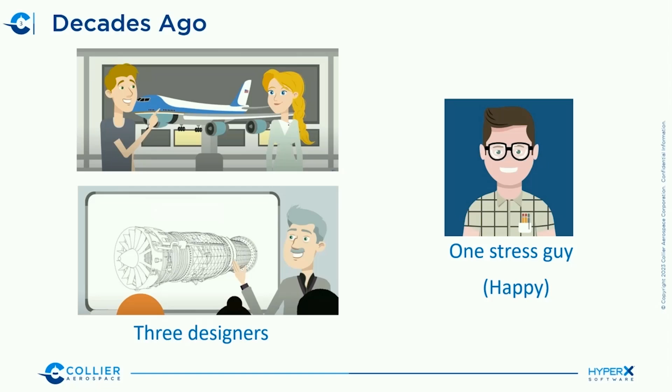Chris mentioned that back in the 1980s, there were essentially 3 designers per 1 stress engineer. In general, the stress guy was happy back then because he was able to stay 1 step ahead of his designers. He was able to answer their questions and use his experience and judgment. He could inspect a part, define the load path, figure out what the critical load case and critical failure mode would be, and analyze to that. He wouldn't necessarily have to analyze to all the different failure modes that could exist. That's the reason he had the time to do it.

Myself, I was a stress engineer. I worked on the B-2 stealth bomber in the 1980s, and everything was done with a sheet of paper, a pencil, a calculator—not a slide rule, because I'm not that old. Literally, it was only maybe that thick, and a whole part was nothing but that thick of paper with hand calcs. We used 4 significant figures for the variables.

Then in the 1990s came Excel, the spreadsheet. So not just in the financial markets, but also in the stress community in the aerospace engineering world, we started doing margin of safety calcs with spreadsheets. They became sort of like baseball trading cards, where people were like, oh, this is kind of cool, I'm going to create my own Excel spreadsheet and do a margin of safety calc. Over time, it became the norm, the expectation, that every single margin of safety had to be calculated for every almost load case. You couldn't really leave any stone unturned.

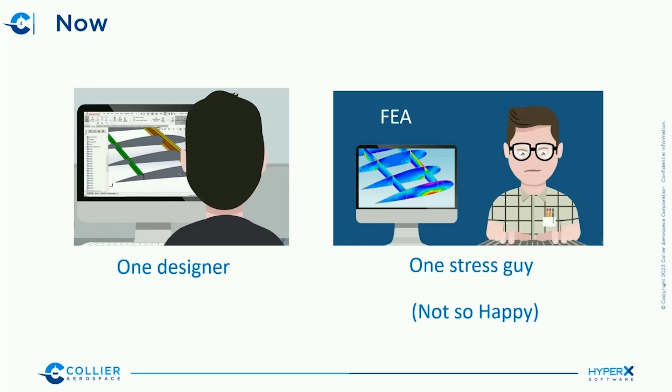Designers, while they have their parametric CAD systems and are able to do quicker changes to their model—in the case of the wing, you can see here the ribs and the spars—maybe you can change the flange width of a rib. But the stress guy is over there busily typing away on his computer, having to analyze every part to every load case with finely meshed finite element models, looking at the strains and stresses in those elements, and then having to go to Excel and figure out how to get that data in to do those calculations.

It's burdensome, right? So yes, FEA and Excel are useful tools, no doubt. Now we're more thorough in our analysis, but we're not keeping up with the designers. So the villain clearly then would be the volume of the data—it's the copying of data from one output and pasting it to the software of another program.

And of course, in Excel, you have all the issues with the cell math. You have different sheets, different references, very long formulas, and these little small calculated fields. It's very cumbersome to figure that out and maintain that data.

What we do know is model-based engineering is here to stay. The idea of not leaving any stone unturned is going to remain with us, and that's a good thing. But what we're promoting is the use of HyperX along with those FEA models, letting the models do more of the load path determination, and letting HyperX take over from there.

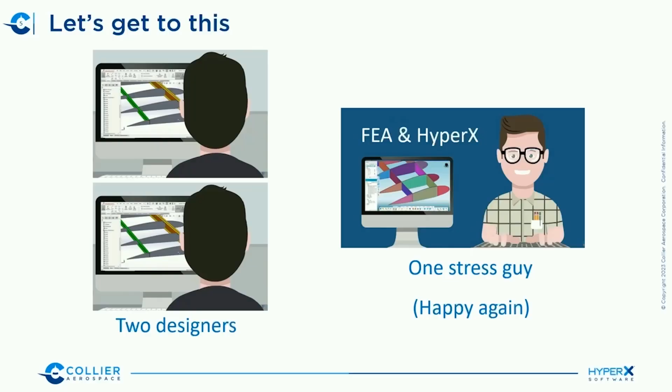So performant automation is the essential part of what we do with our software. And as a way to explain it, let me go back in history.

So after I worked on the B-2, I came to NASA Langley. I met Phil Yarrington - he's back there. He's been with me from the very start. We both worked in the hypersonics office here at NASA Langley on the hypersonics program, and our group's purpose was to evaluate contractor designs that came in from Rockwell, McDonnell Douglas, or General Dynamics. These names are all changed by now.

Because it was an unusual flight trajectory, the aircraft itself was unusual - things we had never seen before. And also the material systems were very unique. We had carbon-carbon, silicon carbide, metal matrix composites, of course your typical polymer composites, superalloy metals, and then a whole bunch of panel concepts. These panel concepts were kind of unusual too.

And we had to look at all these combinations rapidly. We had to figure out if the airframe would fail, and we had to figure out what the weight would be if it survived.

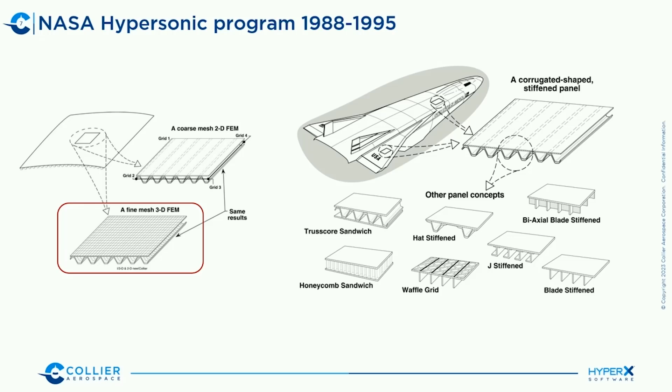So one of the things I did from a mathematical perspective was, if you look in the bottom left here, you can see traditionally the way that models were made was to discretely mesh the stringer, either with shell elements or bar elements. But the problem with that is a high element count, slowing everything down. So I came up with a thermoelastic formulation that would accurately represent the behavior so that the global finite element model could have less elements. They could be planar - they didn't have to represent the discrete shape of the stringer.

And what that also provided us was the ability to rapidly explore or evaluate different concepts, different shapes, without having to remesh the model. So that was an example, from a mathematical perspective, of how we were able to not produce more work for the stress engineer, but actually help the stress engineer get work done faster. And that's really what we're about.

So if you look at our software over time, in the early 2000s we already had this series of chained workflow automation. I'll just let you guys read those for a moment.

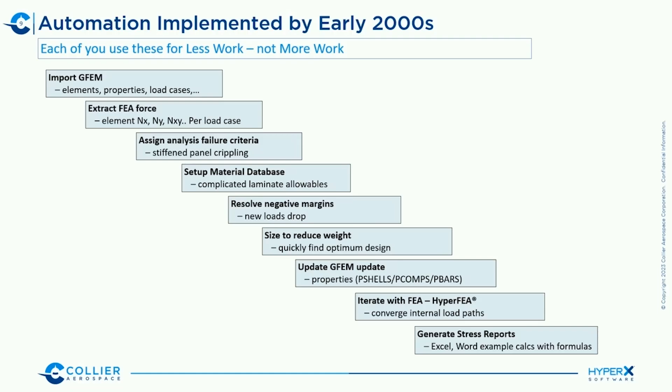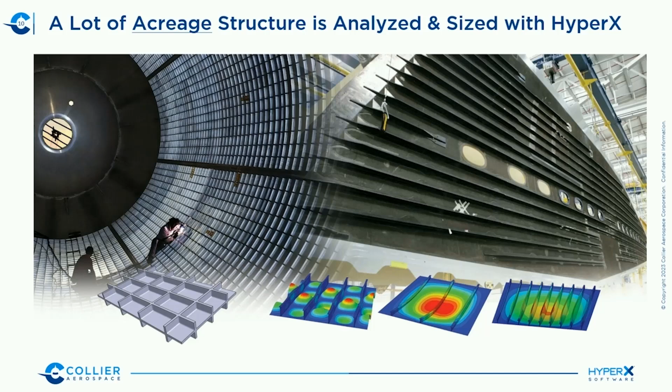I know that all you guys that are true HyperX or hypersizer guys would agree that these are the functions our software performs that really do help you get your job done faster. You may say, Craig, okay, we get it, you help automate. But I'm not convinced yet that you're really going to help the stress community get back to maybe even a 2-to-1 ratio.

To do that, I would have to convince you that we also impact a lot of structure. So if you have an aircraft, it's not just a flap, it would be the acreage area, right?

So if you look at the image to the left, this is a Space Launch System hydrogen tank, quite a large piece of structure. Everything you see there, the metal orthogrid, HyperX analyzes, optimizes, and does the stress reports for. On the right, you're looking at the upper skin cover of a commercial aircraft. Composite, same story - we perform a lot of the analysis and optimization for that.

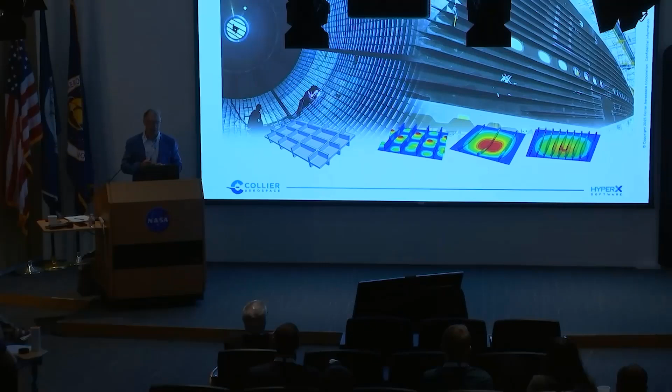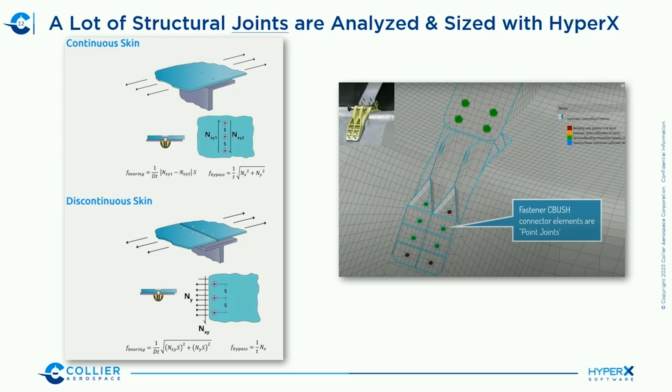A lot of the failure modes you see at the bottom there that you traditionally would need FEA for, we're able to do either analytically or with some kind of energy buckling solutions. We also do a lot of joints, not just mechanically fastened joints, but also bonded joints as well. So maybe you're getting a sense that, yeah, we do impact a lot of structure.

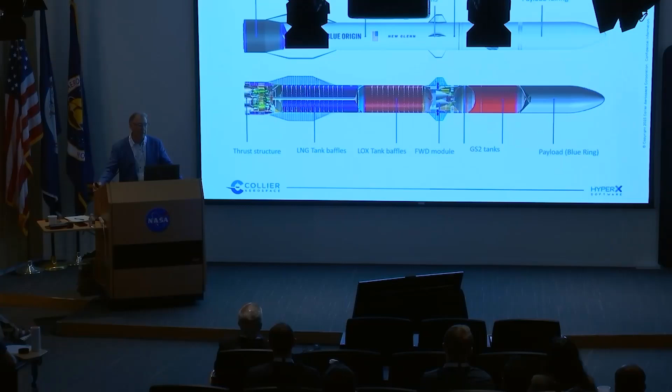The top image is the OML, and you can see all the structures there that we've impacted. The second image below that would be the internal part of the rocket, and that's all the other pieces that we impact, like baffles and thrust structures.

So let me change gears for a moment. Let's talk about the presentations for today. First up, after I speak, is going to be Paul Dufour from Boeing Phantom Works, and he's going to be sharing with us the use of our software on Boeing Phantom Works projects.

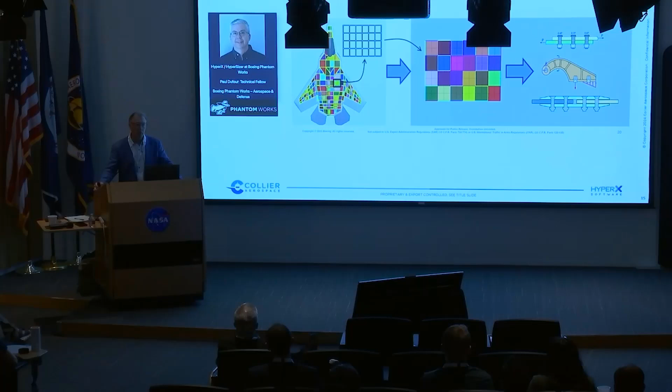In addition to that, you see that green square in the middle, and that could actually be different panel concepts. Let's assume it's a metal orthogrid. So the metal orthogrid has these local stiffeners, and as I mentioned before with NASTRAN, that smeared approach allowed us to very effectively represent that with a coarse model. We're doing maybe the same here at this phase of the project, but we are still able to size this orthogrid along with the bones of the structure.

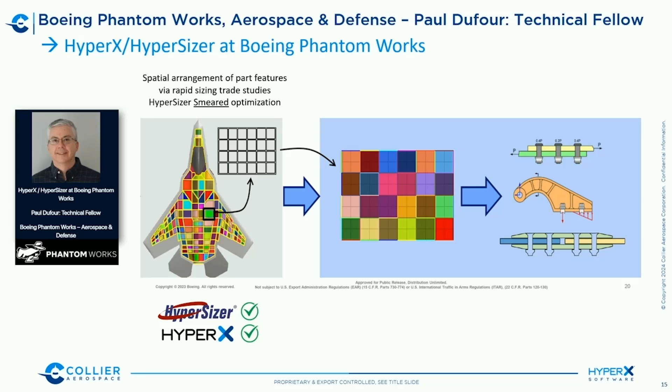And hypersizer was used for that, and I got a green check mark box next to HyperX because it's taken us working with our industry partner, but it has now been approved for use on their projects. Paul's going to be talking to this topic.

So after we go through that phase of a project, you make a decision on the layout and even the details of the panels, and you do a local sizing, pocket by pocket and stiffener by stiffener analysis. In this case, this is discrete optimization because the model is discretely represented. Again, hypersizer and HyperX now approved for that.

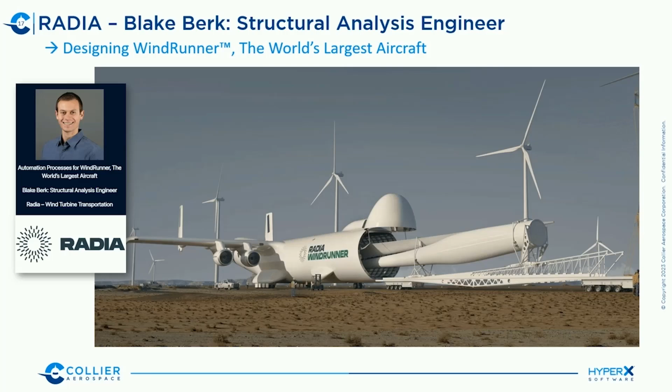Next up, we have Blake Berk from Radia. He's going to be talking about the Windrunner, the world's largest aircraft. As you can see here, one of the purposes is to haul these very large wind blades. This aircraft is so large that if it were laying in a football field, from nose to tail, it would go from end zone to end zone, and the wingtips would actually touch the stadium on one side and the other side. It would be 7 stories high - it's a gigantic airplane.

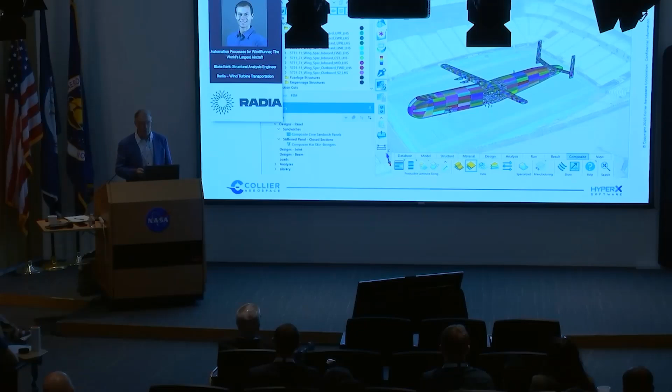I guess what I would say about this is that they use our software to go beyond the typical Nuts and Bolts type analysis and take full advantage of the analysis methods that are native in our software.

Let's see here. I think I've got my, yeah.

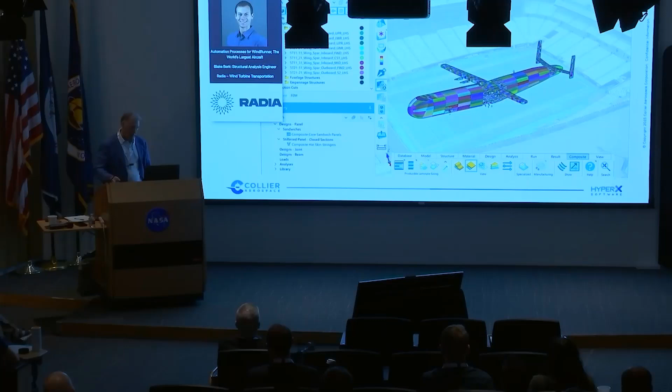Next up, now understand that Jonathan Russell, as Yvonne mentioned earlier, has been delayed in flight. But he is going to tell us about their use of our software on this remotely piloted drone. This drone, even though it doesn't have a pilot, has an 80-foot wingspan from tip to tip, so it is quite large. He will be focusing on fundamentally, again, using the HyperX methods out of the box.

And the way that they were able to put in proprietary material and composite allowables. But in particular, he's going to be emphasizing the stress reporting capability of the software and the thousands of pages of margins of safety reports, or number of sheets or pages, that they produce to achieve that certification. So basically, from the beginning to the very end, to part release to certification, is the story there.

With us also is Don Heathcock from EOS Aircraft. He will be telling us about the role of HyperX for his project, which I'll let him reveal. But you can imagine for a sustainability type aircraft, fuel efficiency is paramount.

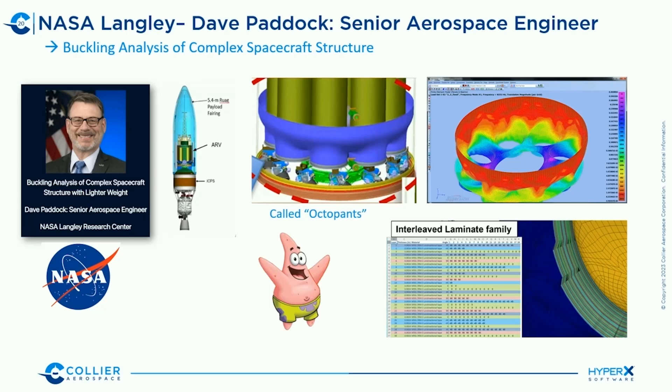On a fun note, this is an image from SpongeBob, Patrick, and it's like the perfect representation of the shape of the pants, the octopants, and the belly and everything. I don't know if Dave Paddock is here. If he's here, oh, there he is. Hopefully getting a chuckle out of this.

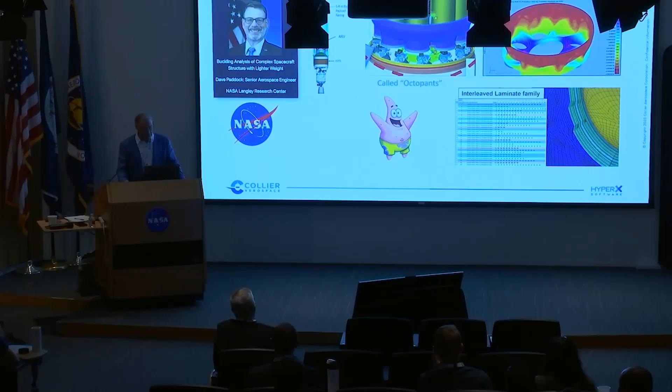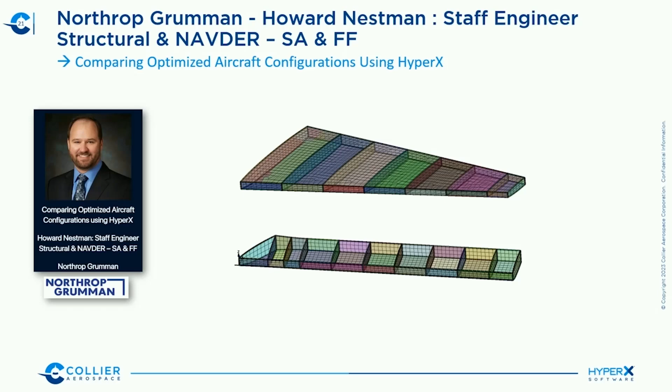Next up, we have Howard Nestman from Northrop Grumman. He basically started from nothing at all, opening up HyperX and learning how to use it, while also creating two benchmark finite element models for a wing, one tapered, one not.

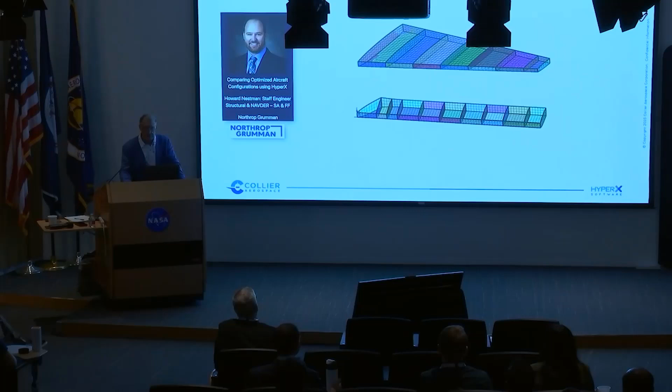He chose a mechanically fastened Z-stringer to see how he could optimize that. But he also included the study of the rib spacing as well, to see the weight impact of that. So he will be sharing with us his experience of never using the software before, and how quickly he was able to pick it up.

Michael Peck from Aurora is going to be talking about the Liberty Lifter. It's a DARPA program, Defense Advanced Research Projects Agency program. The purpose is to design, build, and fly an affordable X-plane. And as you can see in the image here, it flies low to the ocean surface, and that's to get the wing in ground effect for increased lift and range.

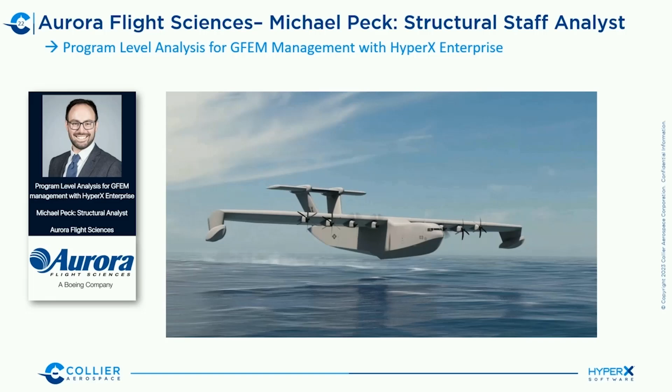This wingspan is 200 feet. So he's going to be talking about how they use GFEM in their department, and also the enterprise use case. You may have heard us mention this before, but we do have a specialized capability for those that want to deploy it on a large scale within an organization, and we call that the enterprise.

Brett Bednarcyk from NASA Glenn is going to be talking about machine learning, the Bayesian optimization technique for optimizing these cryotanks. The role of HyperX was to basically help that optimization, and the machine learning's purpose was to help create better laminate families for this purpose.

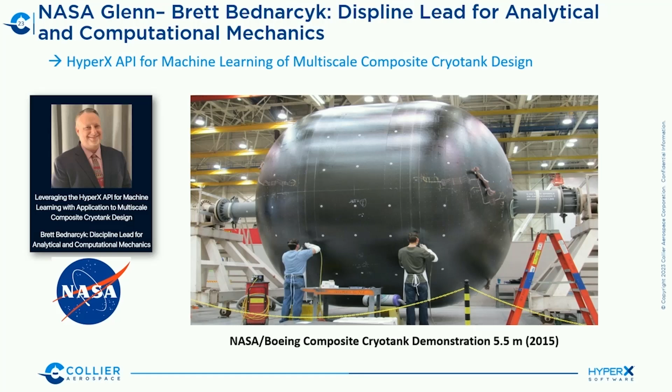Relevant to HyperX is the way that they ran multiple trade studies across hundreds of load cases, and so we look forward to that presentation.

Now on day 2, starting off, we have Mahesh Patel. He's going to be showing us the X-59, a supersonic X-plane. It was a NASA project contracted with Lockheed, who then contracted with Swift to actually design that nose. If you look at the blue there at the top, you can see the dimension showing you just how long that piece of structure is.

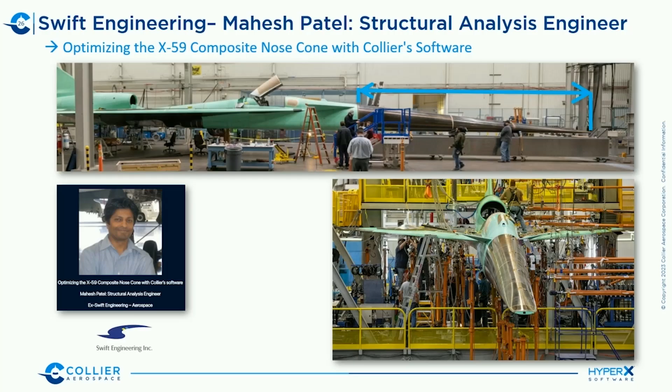So they used our software to do the mass, obviously weight savings, and to filter out critical loads. But they also used HyperX for not just the acreage panel sizing, but also for the joint analysis as well. So the nose cone successfully passed proof testing, and they were very proud, and they delivered this hardware on time to Lockheed.

We have Jet Zero represented today, and Logan Thomas is the first speaker.

Let me just take a second. My uncle's with me today. He's an engineer as well, and he was only going to be here today. No pressure, Logan and Napsia, but now that he knows that Jet Zero is going to be here, he's thinking about coming back tomorrow just to hear your presentation.

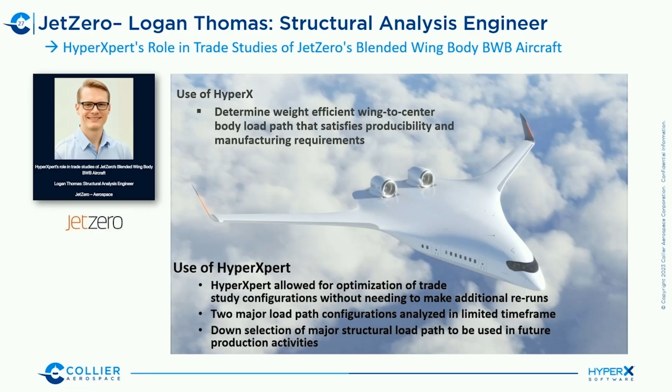I think that may be because we're excited, it's the East Coast, and I think the governor of North Carolina says there's going to be the largest job commitment in North Carolina history, 14,500 manufacturing jobs outside of the Greensboro, North Carolina area with an average of $90K salary. I think North Carolina is investing $4.7 billion, but they anticipate that over the life of the project, a $250 billion revenue stream to the state. So anyway, we're very excited about that.

Other good news about Jet Zero: they recently passed their full-scale demonstrator CDR, and of course the announcement I just made. With all that, I guess by now you've read the bullets, so I don't need to go over those.

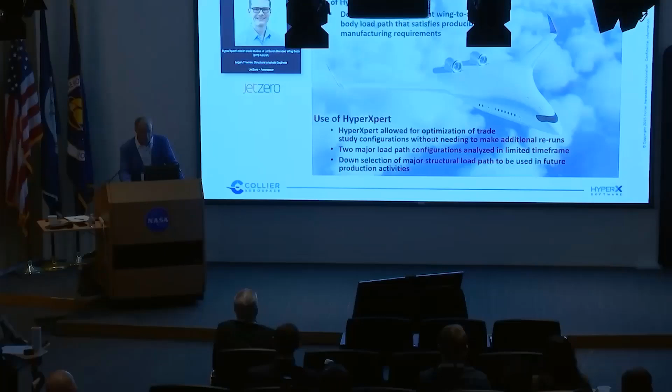Next up will be Napsia, also representing Jet Zero. Her work uses Nastran Solution 200 aeroelasticity along with HyperX. The HyperX role basically is to provide the section cuts and to optimize to the required EIGJ stiffness terms that the aeroelastic analysis is telling us.

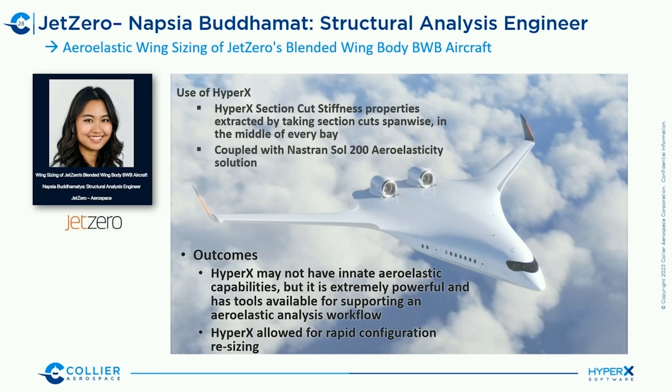One of the roles our company played was obviously as the software provider, but we were also under contract for this project, and we did structural analysis and dedicated analysis plugin support for this work.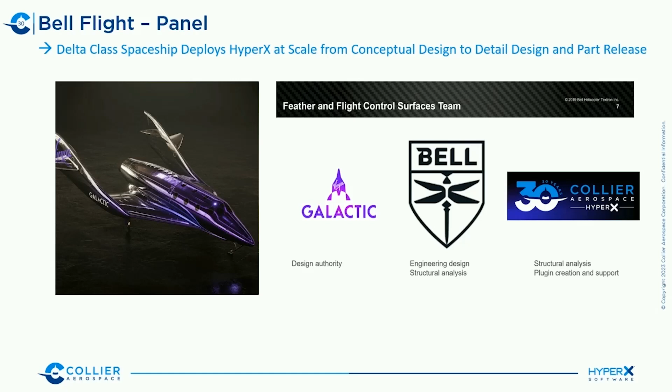Together as a team, they were analyzing the feather structure of this spaceship. Many of the capabilities, used from preliminary all the way to detailed design, allowed them to take advantage of the full suite of capabilities, including the enterprise tools.

We will hear from this panel about these particular workflows. The pie chart shows, in blue, the percent HyperX used in terms of the other tools they had available.

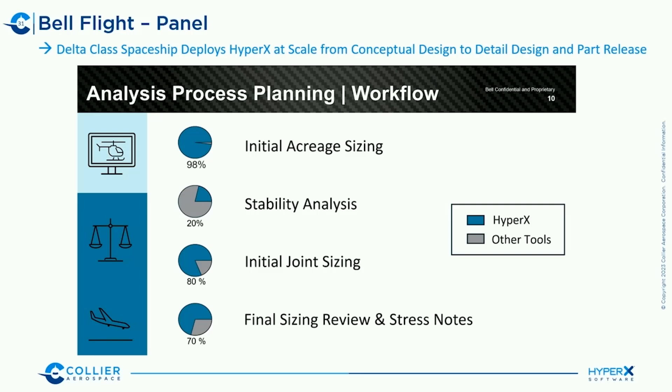Lloyd Eldred, NASA Langley, will be talking about his use of our software, in particular working on his structural preliminary analysis. And I can't read that, but you guys can.

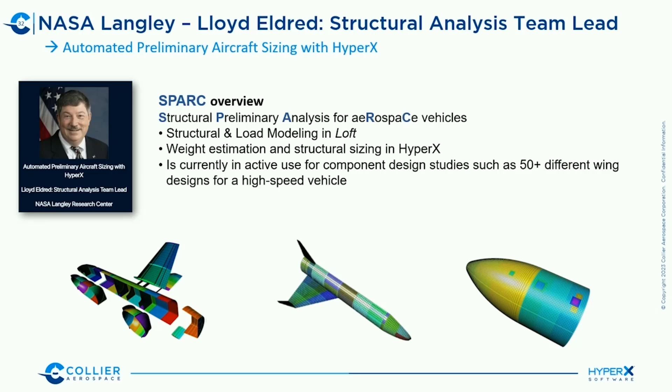By the way, we want to give Lloyd a little bit of applause because he's the guy who's done all the background work, along with Yvonne and some others, to make this event take place. So it's been quite a lot of back and forth between Lloyd and us to be here today. So thank you, Lloyd.

So our last speaker is 96 years old, okay? And this guy is legendary. He's the guy that wrote the textbooks. He's the guy that we learned composites from, Dr. Steve Tsai from Stanford.

And he's going to be talking about his new proposed way composites are done. It's called a double-double, if you haven't heard it already. Double-double is kind of, you know, in the aerospace industry, we do quad laminates, quad meaning 0, 45, 90 ply directions. He's got a theory where you can use off-diagonal or fiber directions paired together, like 20 minus 20, positive negative 70, or something of that nature.

And there's some advantages to that. And so we, as a company, adopted his approach as well. So in the image to the left here, you can see in purple, that would be a tab in the software where you could click that. And you can automatically generate double-double laminates.

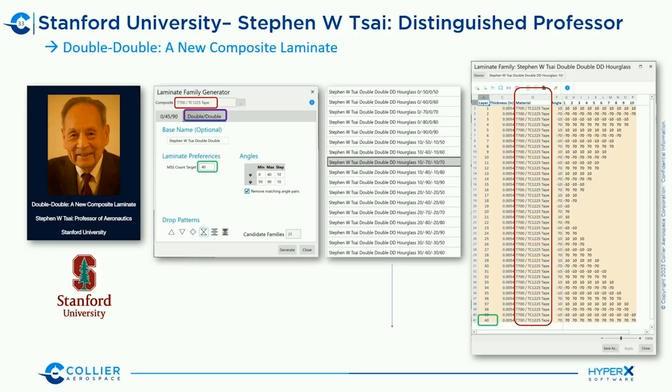So in the red box would be that's a thermoplastic material system. And the green box would be the number of what we call the main stacking sequence, right? So basically, we have now automated the ability to generate these. So moving from left to the middle, you can see all the laminate families we generated from this. And the far right, then, is just one example of the laminate family, as you see in the gray. And so you can have a library of these immediately made, and then you can use it with our software.

All right, let me switch now to the presentations by Collier. And our presentations are mostly focused on new capabilities. So first up will be Stephen Jones. He is our Vice President of Product Development.

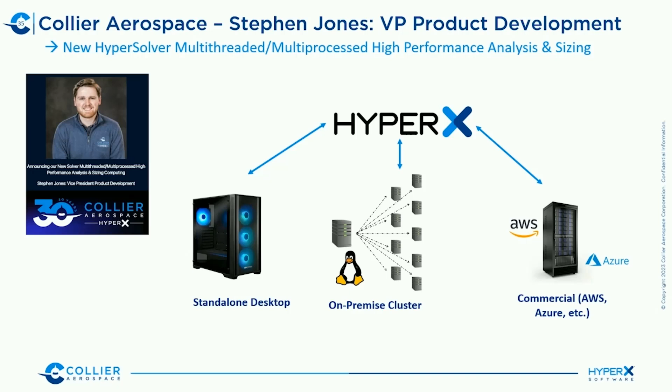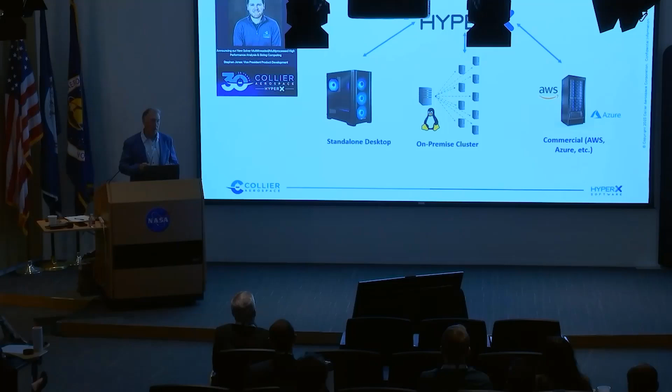And in particular, we want to talk about our new solver, or hypersolver. It's a capability that's going to allow us to do full multi-threading and multi-processing on high-performance computers. So it's meant to be a replacement of our current analytical engine, and we're really excited about it.

So our software is really kind of broken up into three components, right? So we have the user interface, which we released about 3 years ago. That was when we provided it to the world as HyperX. And the second phase was the relational database that is the way we maintain all the data. That was kind of under the hood, and customers are not familiar or aware of this, but we can handle terabytes of data now.

Now the third one, the one that we're talking about in this image here, is that solver, the analytical engine. And that is divorced now from the user interface, such that you can choose to run it on your local workstation or laptop. You can choose to run it very easily on your system, your Linux servers. Or if you choose, you can run it in the cloud on like AWS or Azure. And so, yeah, we're pretty excited about that.

The other thing to mention is that it's going to be 50 times faster. And that's kind of across the board average, an aggregate number. But so maybe I should say 50 and jump up and down like a Steve Ballmer or whatever and act like a fool. But I mean, I think that's something that we really should be excited about.

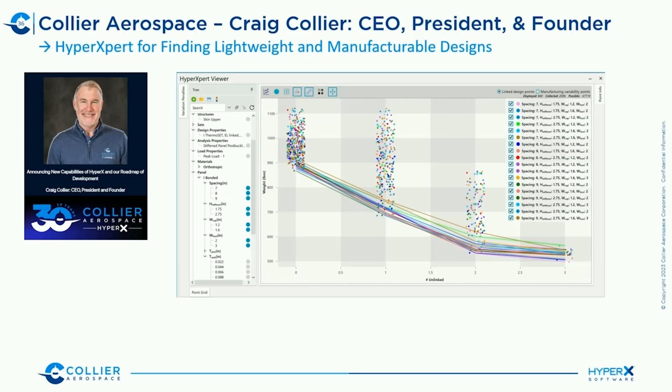And you see on the left a tree. And you see a lot of data points. Since I'm going to be talking a little bit later, I don't need to go through it in detail. But basically, the data points are completely approved designs. These are designs that have all positive margins of safety for the structure. They just simply have a different combination of variables. And the Pareto frontier then is what you're seeing with the lines, and it's helping you identify for a certain combination of, say, tooling dimensions, which one gives you the lighter weight.

After I get up, August Noverre, Director of Research for our CAD, is going to be talking about how we have been continually adding CAD capability to our software, and he'll be talking about the role of that.

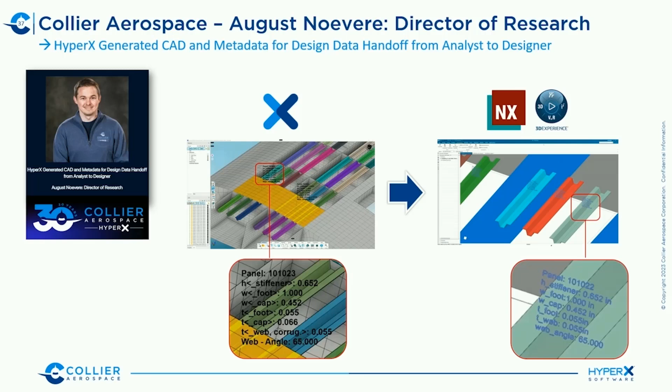We are the ones that first decide what the stiffener or profile shape ought to be. So we create the CAD, and then we allow you to import it into your favorite CAD system, whether it be NX CAD or Dassault's 3DX or CATIA.

But also we recently added the metadata as well. Metadata is a fancy word for basically the text information you see there at the bottom. Why is that helpful? Well, you can always take dimensions off of CAD parts, but it's really nice to be able to see a whole list of them. And it could be used to more readily generate the native CAD by scripting the metadata to do so.

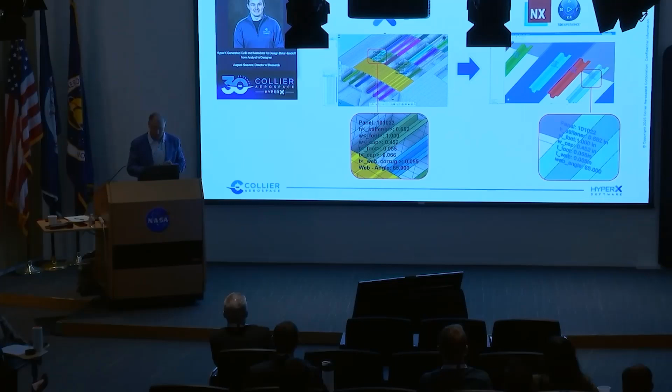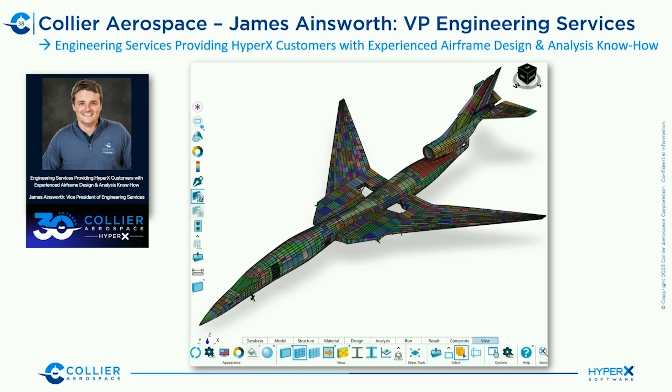After he gets up, James Ainsworth, Vice President of our engineering, is going to be talking about how they use HyperX in their day-to-day work environment. So much like you, they also use our tool to get their work done, which is designing and analyzing aircraft. This is an image of our aircraft that James is going to show. It's a supersonic aircraft, it's defunct now. And I look forward to that presentation.

Noah Prezant, Manager of Methods and Automation, is going to be talking about two things. Basically, one, we stood up a new department in our company for helping us support customers with methods and automation. And part of that is going to be the ability to package, like in a box, the things that are required so that 10 years from now you can get the same margin of safety that you got today.

And we know as engineers that's going to be necessary to do. You have to disposition a part when something happens in the field or there's a new load case or something like that. The realization is it's not just the code itself, but maybe you had some scripts to go with it, maybe some particular DLLs, maybe some particular documentation on that method. Well, all of this can be packaged together so that 10 years from now you unpackage it and you're guaranteed within minutes to get the same margin.

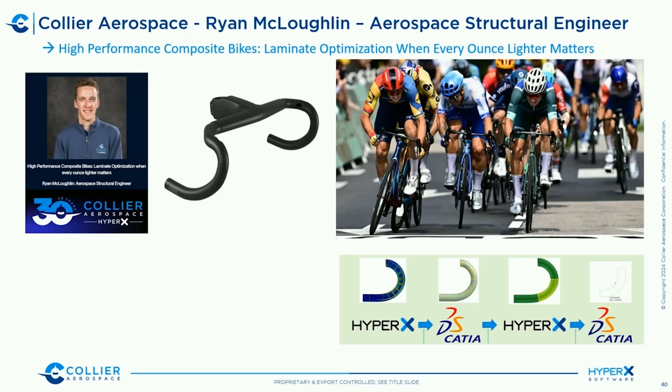Ryan, as Yvonne talked about already, is going to talk about the advancement we've made in high-performance composites in general. In this case, it's the high-performance biking industry. His is on the handlebar this time. So not presented before, but also new capabilities. I'm excited about this.

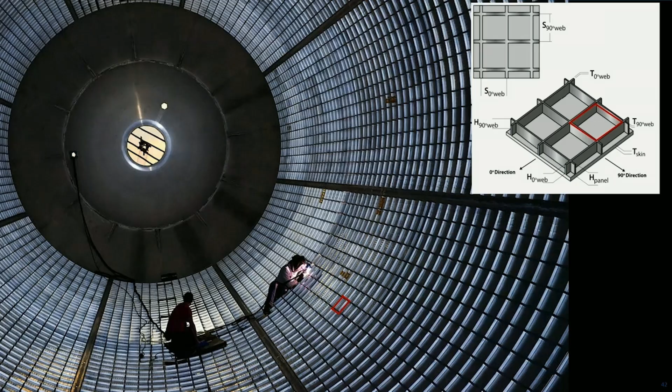And I like to go with this because the enormity of this launch vehicle causes a lot of challenges, right? So what happens is it's an orthogrid, and you can see in the top right basically the first dimensions you want to settle in on are the spacings - the spacings of the webs and the longitudinal, from the bottom of the rocket to the top, but also the spacing in the hoop direction to contain the pressurized hydrogen.

And after you do that, or simultaneously, you also determine what heights and what plate thicknesses you want all of that structure to be. The red square you're looking at essentially represents just one of those little pockets, and there are literally thousands of these pockets, with thousands of these little stiffeners.

And so the challenge is these guys have this kind of loading environment, and this kind of loading environment causes them to buckle. Now we all know that during launch, there's axial compression in the rocket causing general instability or buckling. But we also have this other scenario happening where little tiny buckles are happening all over the place, and we have to analyze those so that we can prevent that from happening.

In the beginning, it could be an analytical solution that's very efficient. But as we mature the design with thermomechanical loading environments, we want something more rigorous. So we go to an energy buckling solution like SS8 - it's an industry standard, right? Well, that runs in 0.1 seconds.

And you think, well, that's fast enough. But not really, because the problem is thousands of these things - 1,000 load cases, 1,000 combinations of variables will cause something that runs in 0.1 second to take 10 days to finally complete.

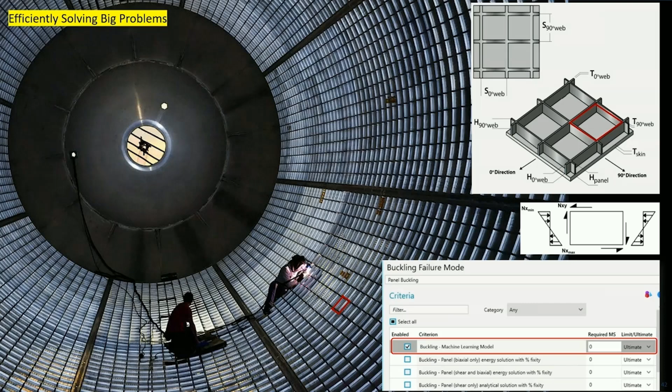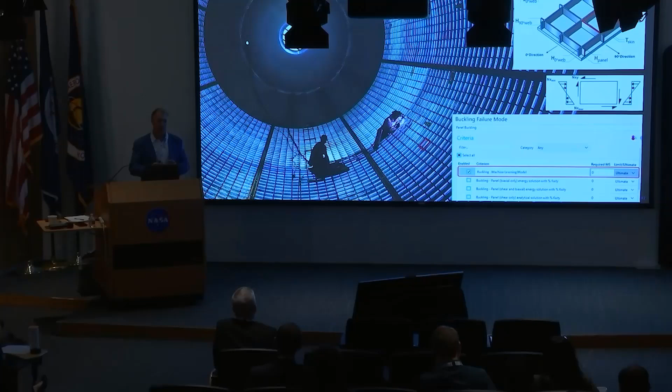As you can see in the red box here, the idea is that in the preliminary design, where you do all the heavy lifting of sizing, you can use this method. And what it will do, since it runs about, after you train the models, about 1,000 times faster, you go from 10 days to 15 minutes. And again, you still have the 50 times faster. So you can see that for us, everything is about fast, faster, or fastest.

Or in terms of Tom Cruise and Top Gun, I feel the need for speed. And if anyone knows me in the company, there are a lot of people so concerned about, and rightfully, are we getting the right margin of safety? They know that what I'm going to say is, how long does it take to run? How fast is it? So I always push the envelope in speed.

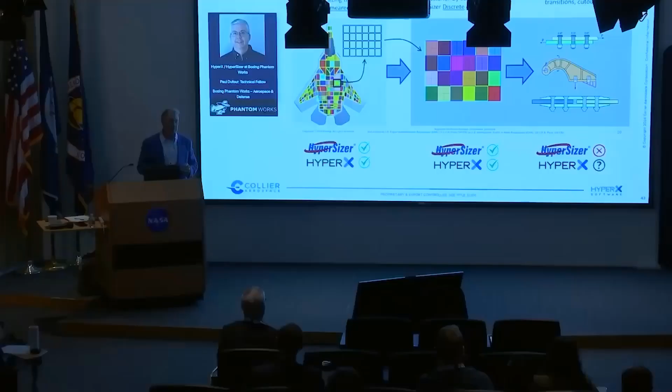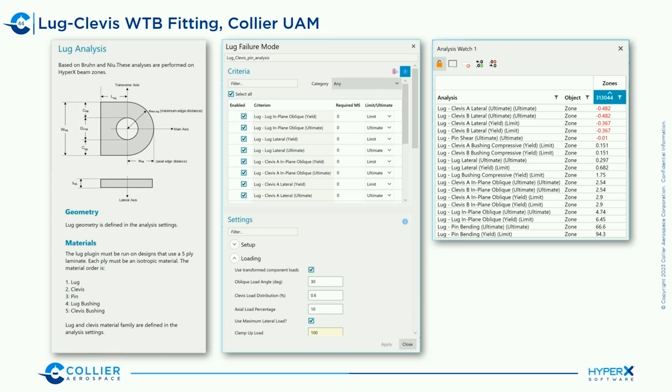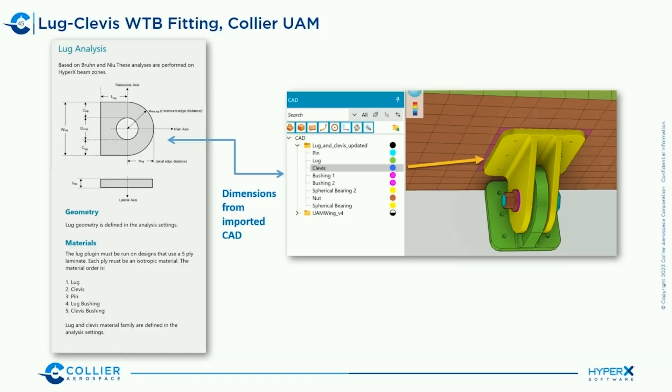These analyses are closed form and they're well known over the years, not an issue with that at all. But the automation we're wanting to provide is to import from CAD, like a lug, and place that on the GFEM so you can visually see where it is, and then create an FEA element type to automatically extract load to feed that analysis, but also take part dimensions from the CAD and enter those into the lug form, with all this tracked in the tree as a bookkeeping tool for an automation perspective so you can easily find these guys.

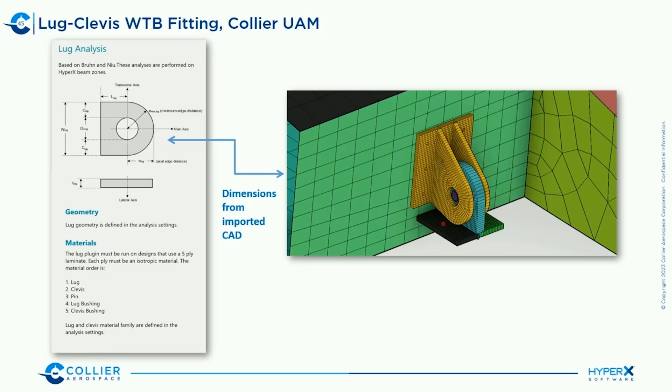Now, in the sense of fatigue, you may need to discretely mesh this, and you need to calculate a stress strain field around that lug. If you do so, we are now working on offering fatigue capability. On the left is a stress-based approach, an S-N approach, Soderberg. That's your typical kind of preliminary early fatigue assessment.

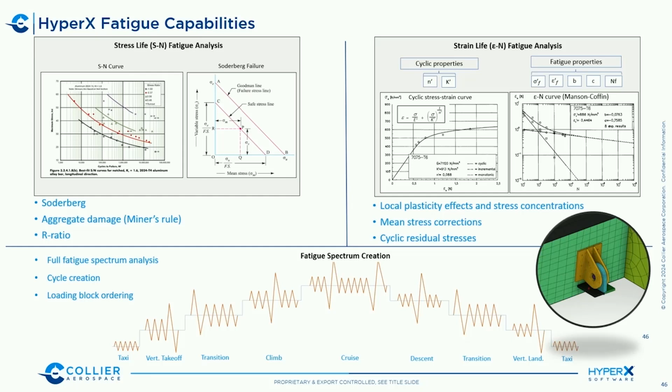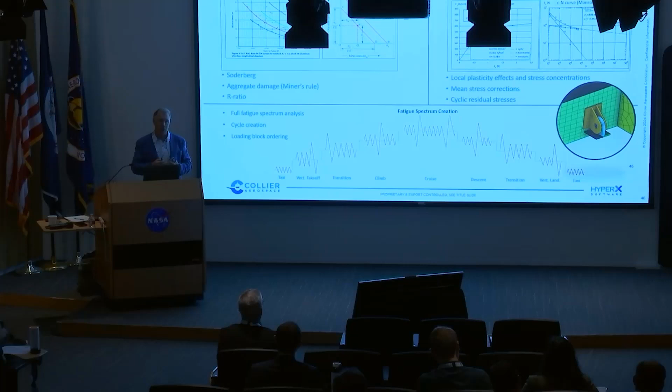We are also offering a strain-based approach, as you see to the right. Of course, the advantage of that is being able to handle plasticity and stress concentrations. That's a little bit more rigorous, a little bit more challenging, but as an automation tool, that's our role to do that. Both methods will use the same fatigue spectrum. In our software, you can define that as well, and edit it. Then the idea would be, doing the strength sizing of the lug, you can also have a fatigue life assessment early on. The advantage of that is being able to flag fatigue critical parts of your structure, but also to maybe prevent that from happening from the start by sizing it out.

Okay, in summary, I got the red light. I don't know how long that's been on. A little bit, okay, I'm wrapping up.

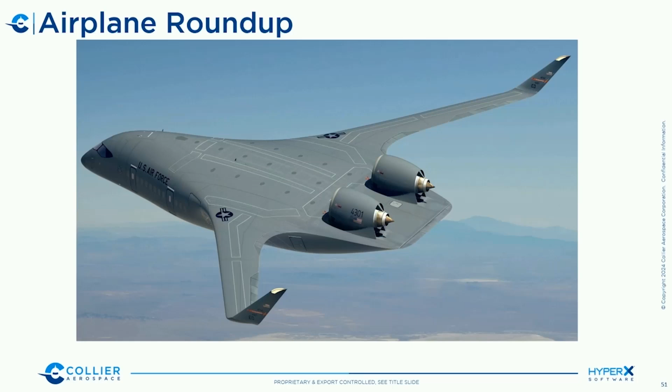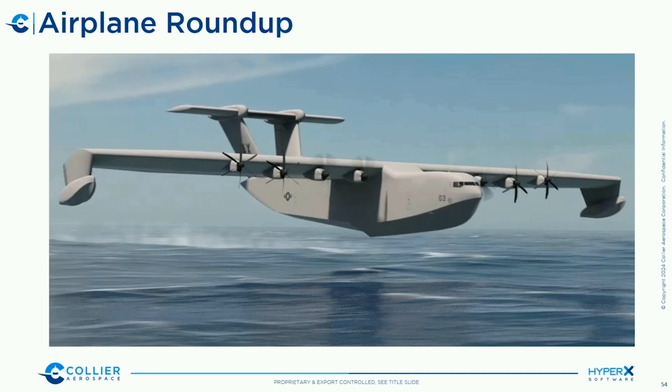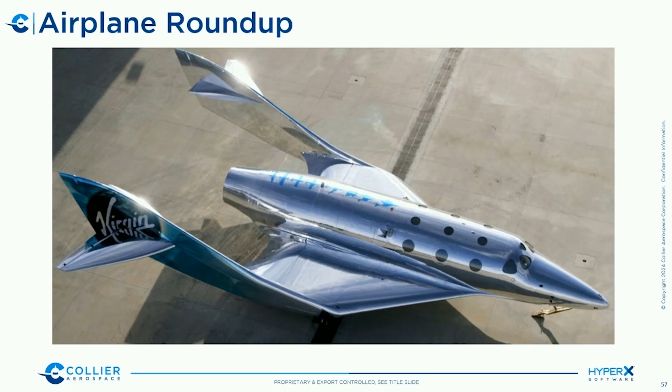Jet Zero aircraft here. This is the military version of that. The General Atomics drone, the Liberty Lifter from Aurora, the DARPA project, the EL-9 short takeoff and landing aircraft, one of many aircraft from Boeing Phantom Works. This happens to be the T-7. Space launch vehicles, such as the Virgin Galactic and the Bell Flight Feather system you see on the aft of that. EOS, sustainable aircraft.